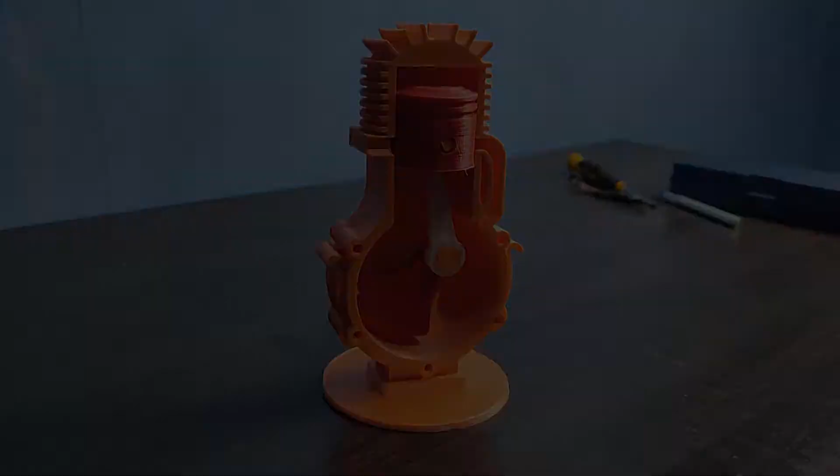For this miniature engine, we didn't make the design ourselves. We downloaded this design at thingiverse.com. You can download the design at the link in the description.

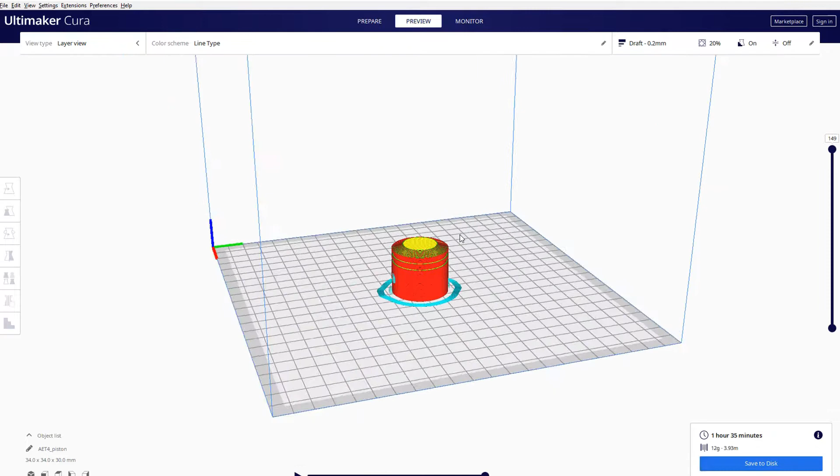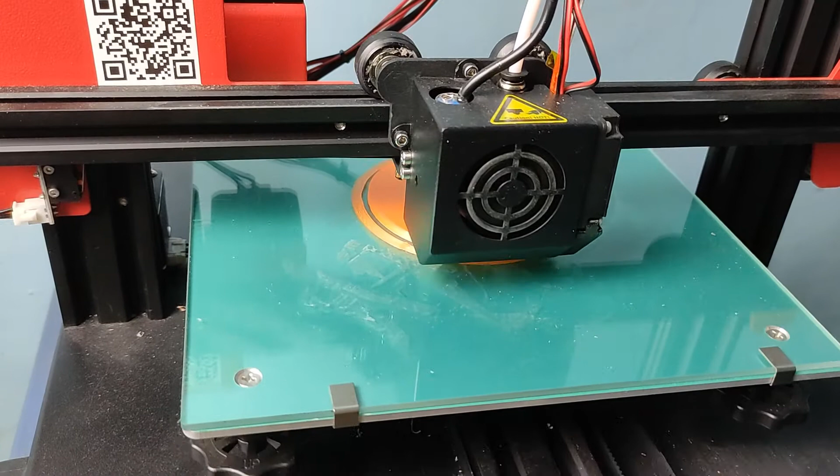First, we print all the parts. We use PLA material for the orange and red parts, while for the white parts we use PETG.

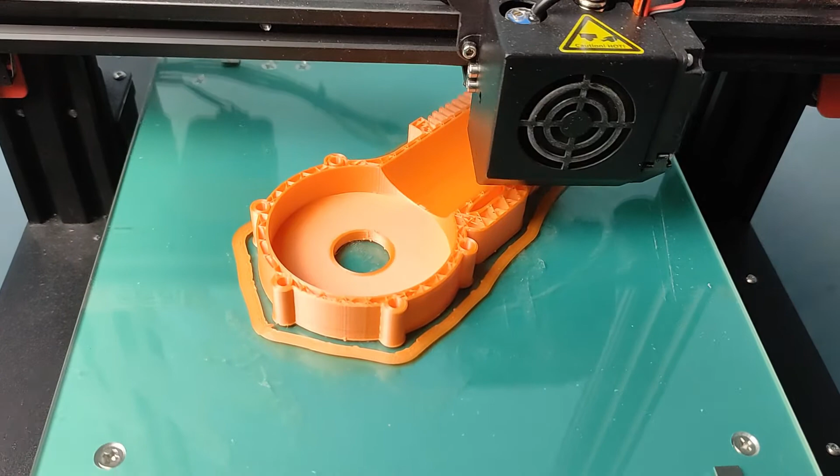After all the parts have been printed, we clean the crankshaft and the connecting rod parts.

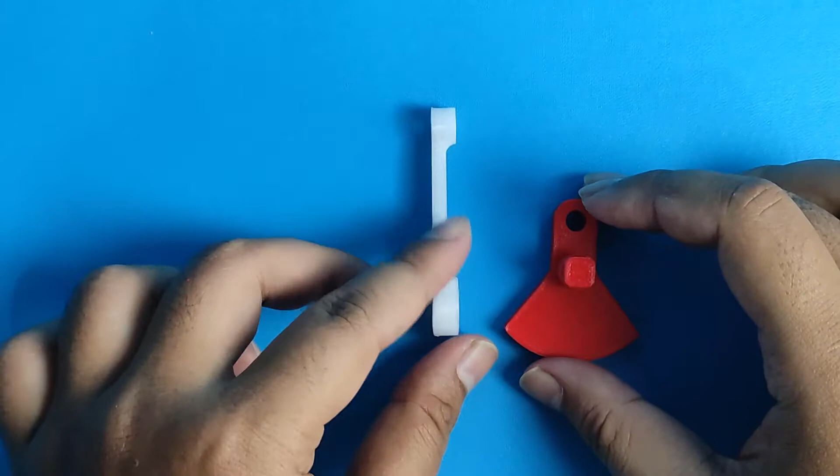After cleaning, we connect the connecting rod part to the crankshaft.

Next, we clean the crank bearing, washer, and engine case.

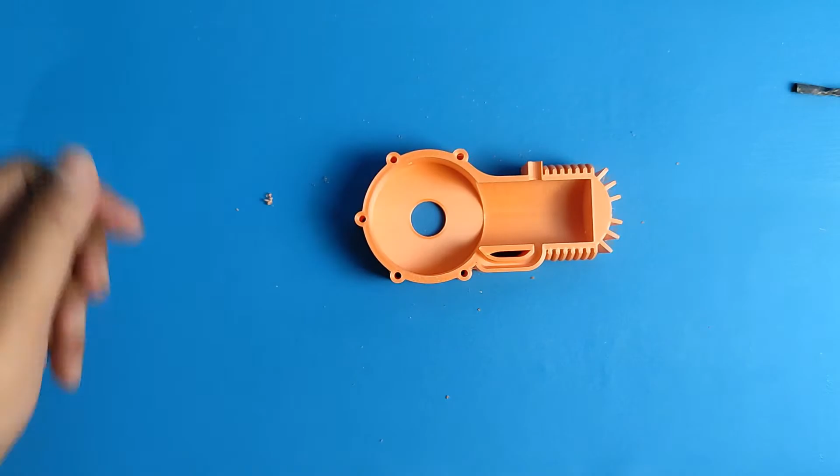We install the crank bearing in the engine case.

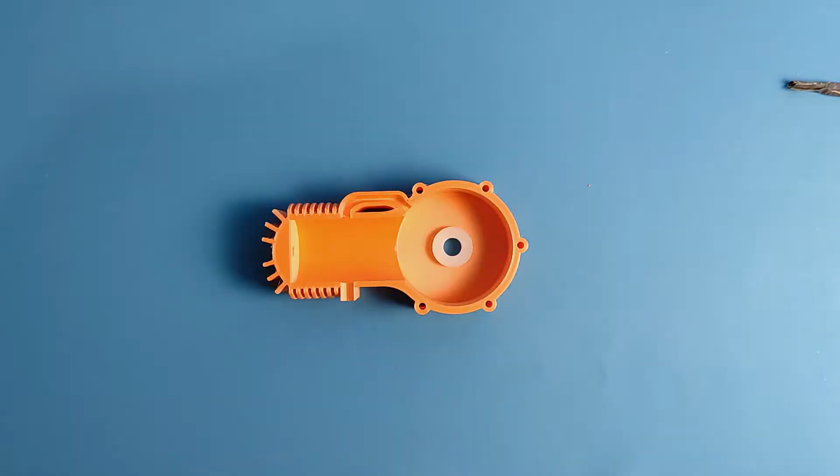Then we put all the parts into the engine case.

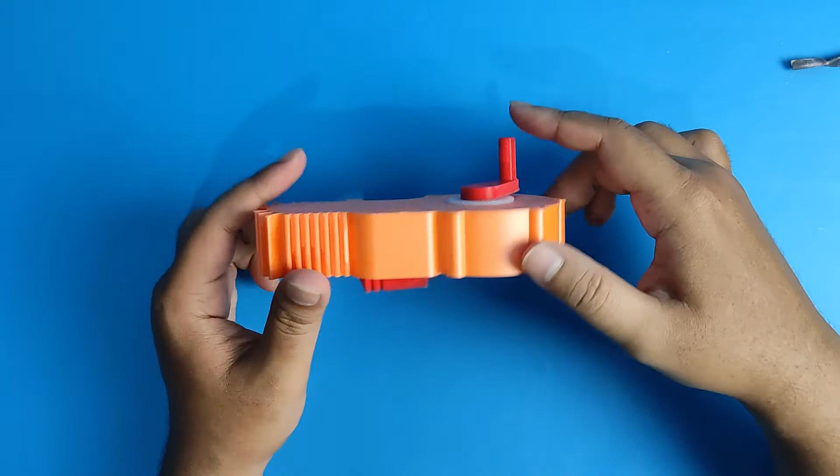Okay, so this is the shape of the miniature engine that we have made. Maybe this miniature is suitable to be used as a tool to help explain how a two-stroke engine works.